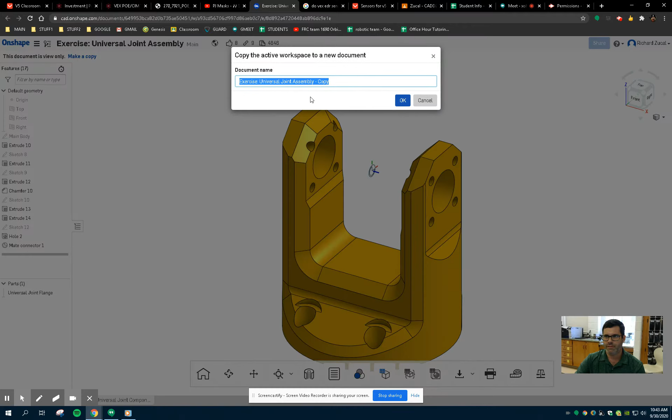Universal joint assembly, make a copy, universal joint assembly, Zucal. I think this is the second one, so we'll call it Zucal 2. Now you'll only see the window that I'm working with in the video. I have the slides up on another screen right now.

Create an assembly tab. Plus, create assembly. Drag it over. Rename it to universal.

I always feel like making words smaller, but I don't want to make the third word in universal joint assembly smaller because then it's a potty word.

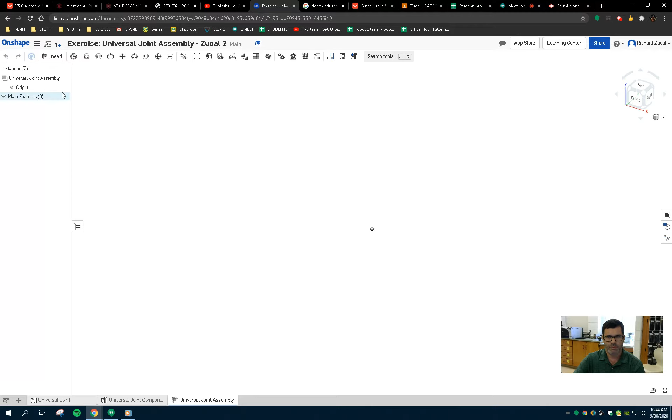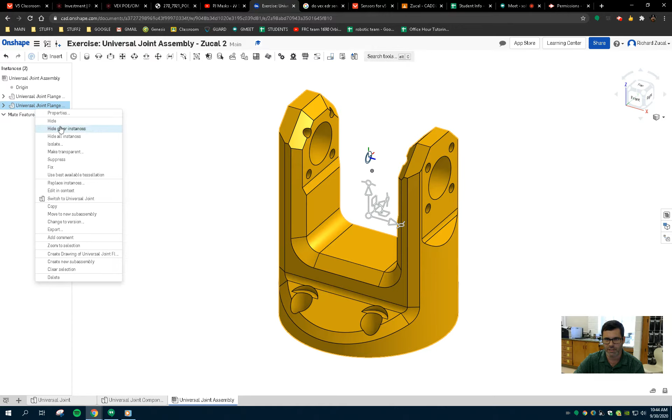Assembly tab, insert the universal joint flange. Insert universal joint. See, sometimes I click things, like I double click somewhat naturally, and I have to keep looking up at the little window on the left because I insert two things sometimes or create two things. So you got to pay attention to that.

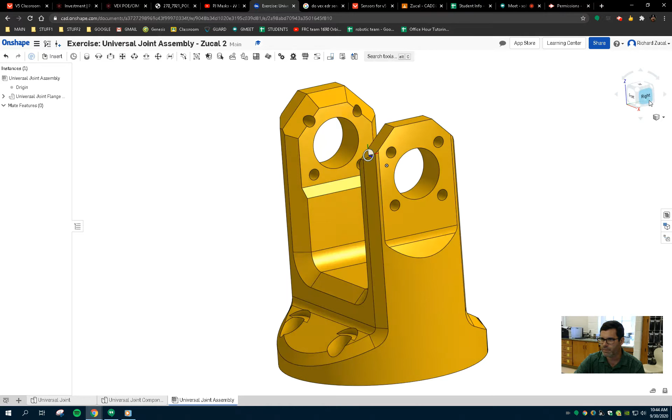Looks like they're trying to align the thing with that. I guess I'll try to do that the same too. One of the things I said in the other video, and I'll try to remind, is when they want you to align things with the origin, trying to do it just from the isometric view does not work. You want to have some two-dimensional views that you're doing it from.

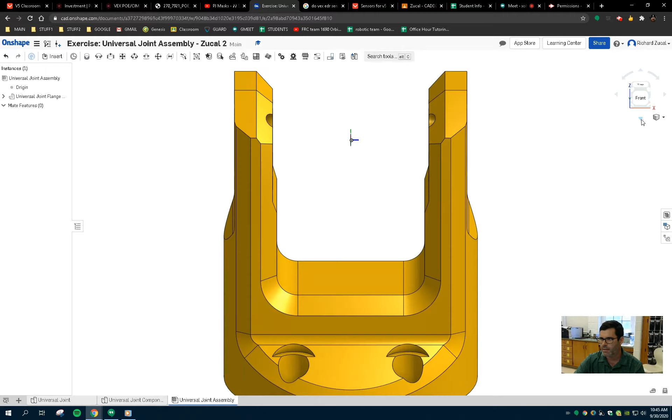Look at it from the right, and then look at it from the front, and then either the top or the bottom. So see, now that looks like it's aligned to the origin. So now I'll go back to my isometric view.

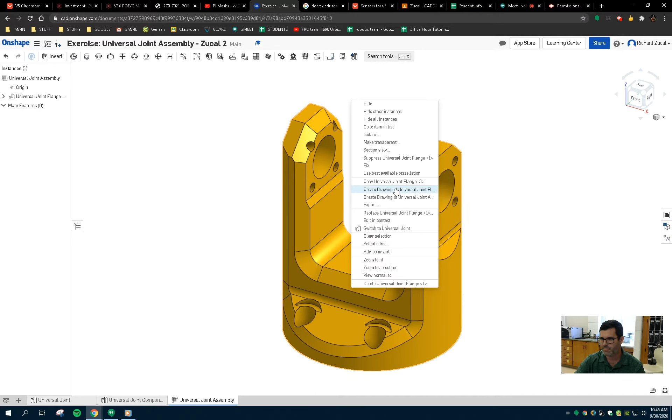Fix the instance in place. I wish somebody could just right-click on me and that's all it took to fix me. Take a lot more work than that.

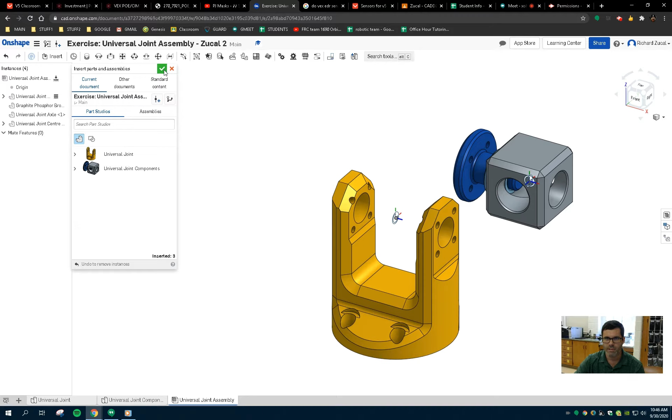Insert the 3 parts from the universal joint components part studio. Insert universal joint. Because I've done this before, it's actually feeling a bit easier. Okay, did I only put in one this time? I only put in one this time. And it looks like the picture.

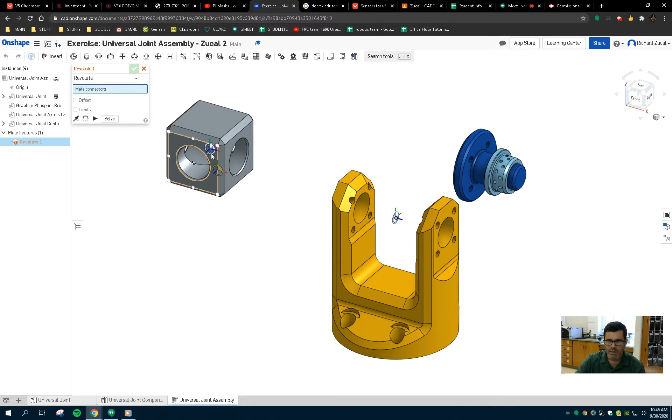Now I need to mate the center block. I'm actually going to drag the center block over here so I don't get confused with other things. What kind of mate do they want? A revolute mate. That one. And it's the one that's going that way. Right? With the center of this. And that looks good.

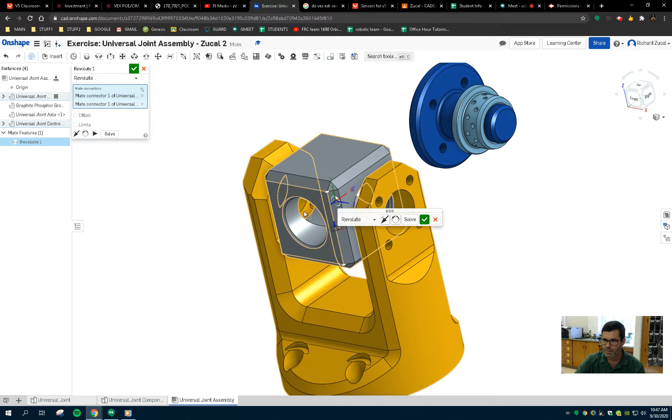And we have to have limits. Negative 90. 90. And we accept.

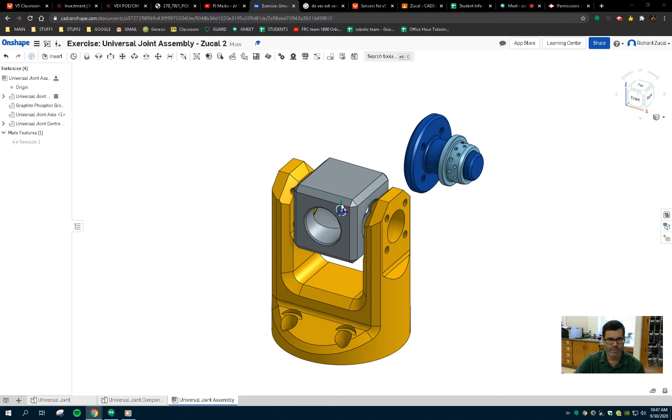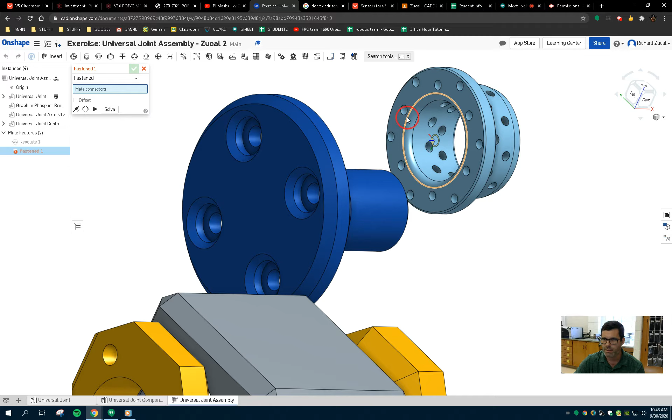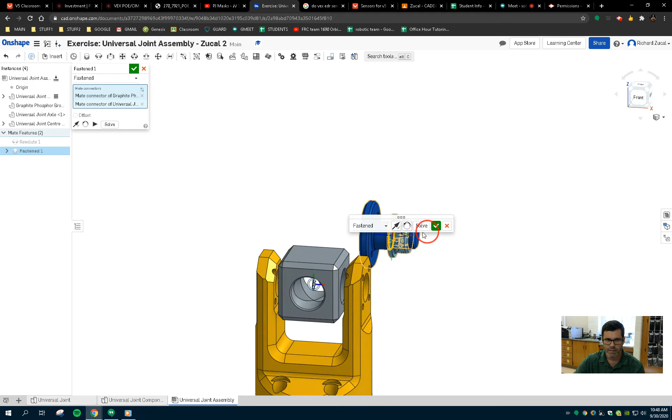The axle to the bushing. I'm going to drag them apart so I do it right. They want this mated with fastened. Needs to be this face with this one, middle ring. Man, you gotta zoom in sometimes. That one, okay? They look mated properly, accept the mate.

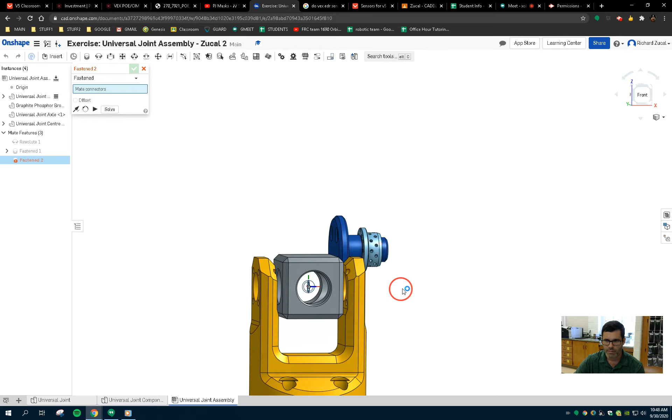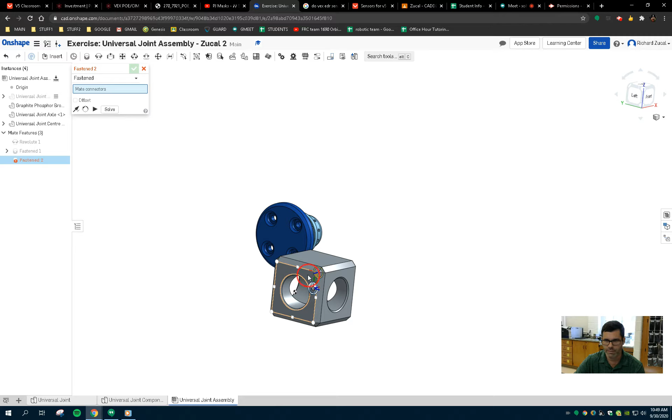Mate the bushing to the center block with another fasten mate. Fasten. You know what? It is hard to see that with this here, so I'm going to go over to here, and I'm going to temporarily right-click and hide that. Did it hide it? There it is. Now I can find the face that they want, which is this face, with that face, so they're flush.

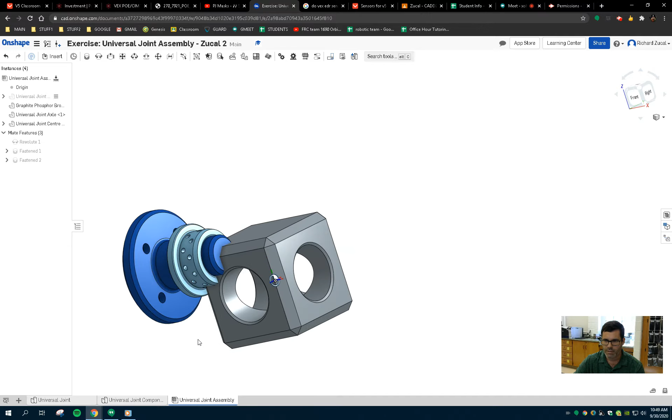That does not look right for some reason. Maybe I didn't pick the circle. Oh, let's go back. Let's hide that again. Fastened. Oh, maybe I was clicking over here, but not the center. Yeah, I think I clicked on that. It should be this.

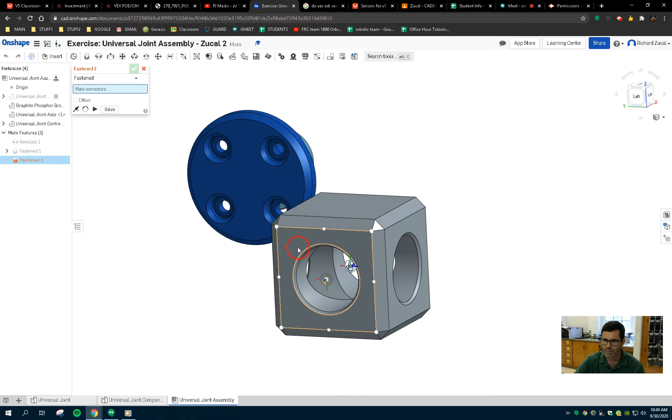With this. And that. And now it looks good. Nice and flush. I'm going to unhide or show that. Now they look like they fit together real well.

Restructure the assembly and move the axle and bushing to a subassembly. Select the two instances in the instance list. Right-click and choose Move to New Subassembly. So these two. There's the flange. So I need the graphite phosphor bronze bushing and the universal joint axle. And right-click and move to a new subassembly.

Rename it Universal Joint Axle Subassembly. I abbreviated, doesn't matter. Now it wants you to move that to the origin.

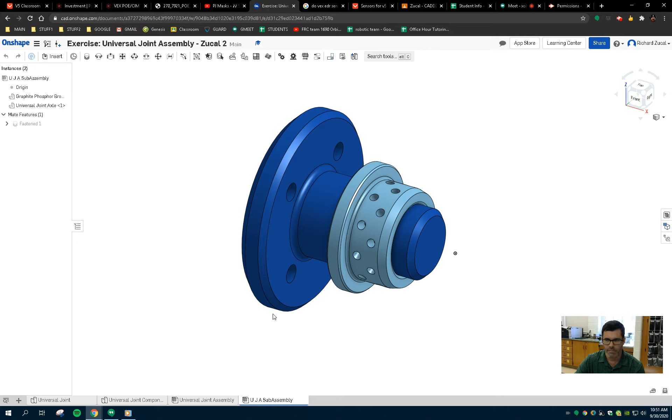So the reason why they want you to move it to the origin is so that when you are putting it into other assemblies as a subassembly, the default where it is placed is relative to where the zeros are, meaning you won't have to offset it or give it other fastening if your original placement is based off of where you want it to go.

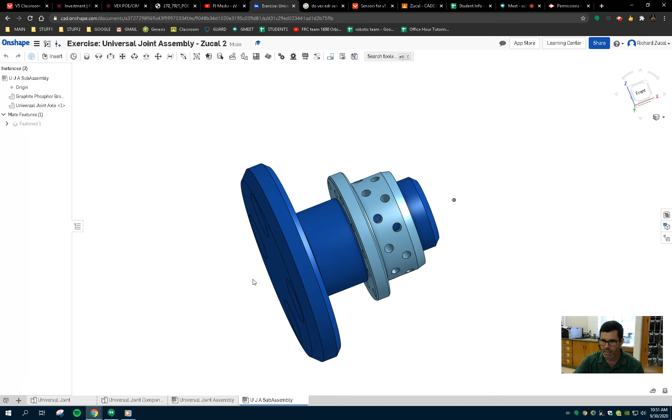Anyway, so now it says we want to click on that. Now this is the tricky part that I've gotten better at. I want to move this so that circle is over the origin. Why is it facing? It should be facing the other way, should it not? Huh. Well, I'm going to move it to the origin anyway. But to make sure I do it right, I'm going to look from side views, not the isometric view.

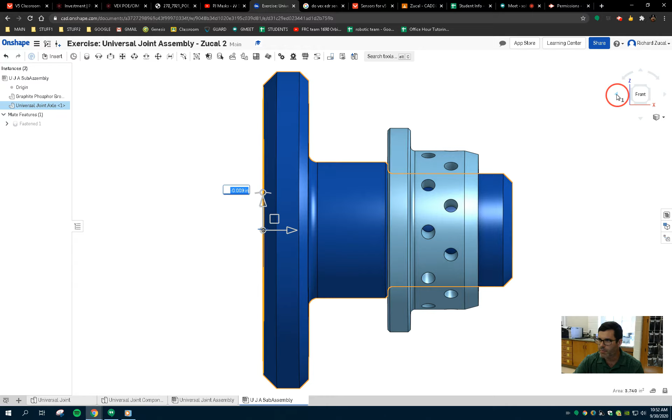Okay, pretty darn close. That needs to slide over. You definitely need a better method to doing that.

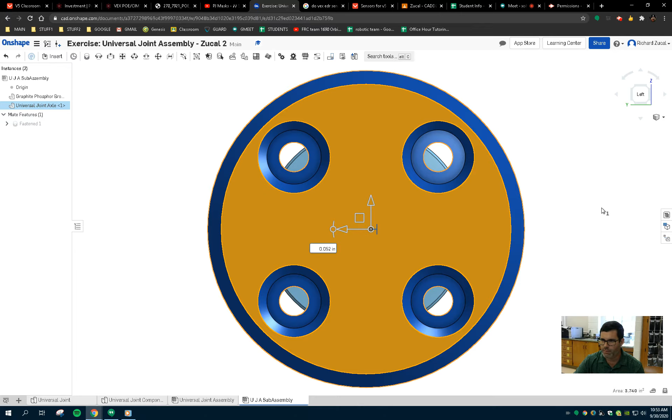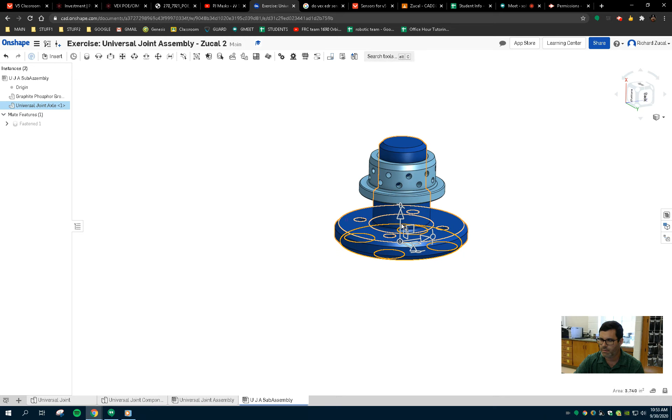The arrow's not going the way that it's supposed to go. So I don't know if that's going to be an issue. I think I'd like to flip it. Well, it says align to Z, so if I align it to Z, I need to rotate it. Which way? Okay, now it should be aligned to the Z axis. Yeah, it is, because there it is, up and down that way, and there's the Z up and down that way. Okay. Fix it in place.

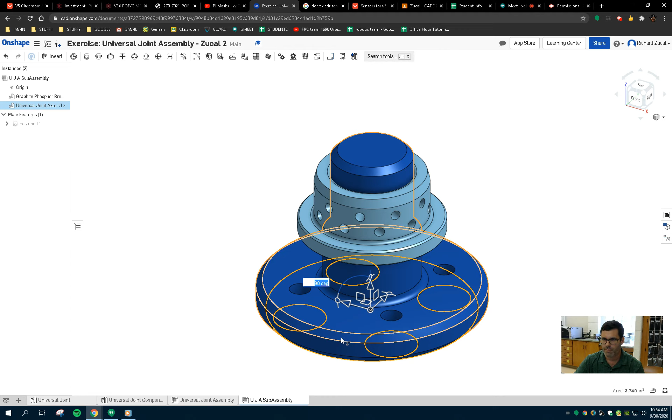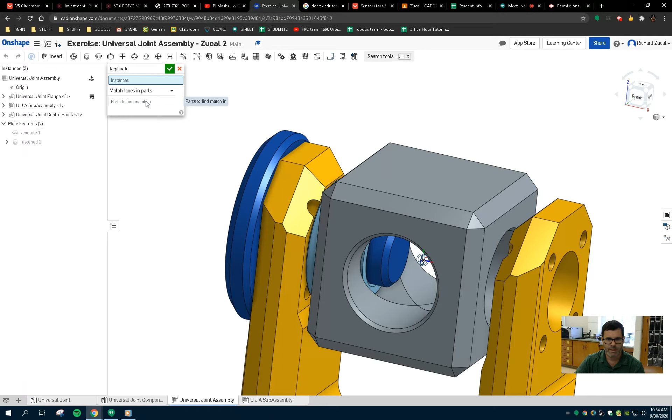Almost there. Navigate back to the main assembly. Select the replicate feature, which is here. Select the subassembly as the instance to replicate. And choose match individual faces from the pull-down menu. Then click the 3 faces on the center block as shown.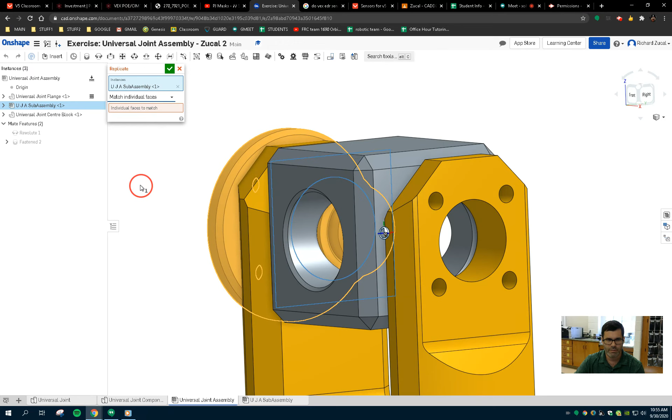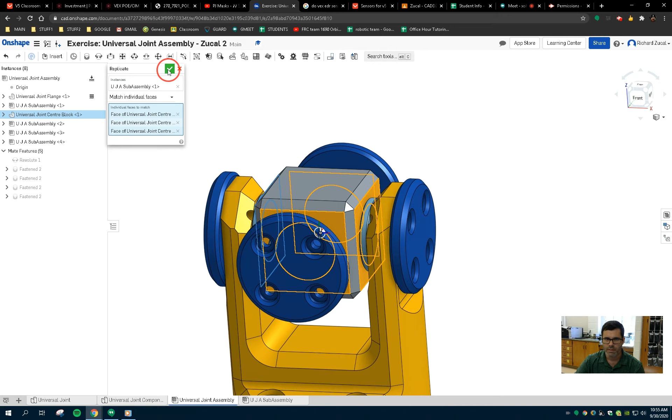Okay, so we need to click on that though, so it knows that we're selecting it. So that one, and that one. Oh look, they're on there, looking pretty good. Accept it. Copy and paste the universal joint flange to a second instance. Copy, paste.

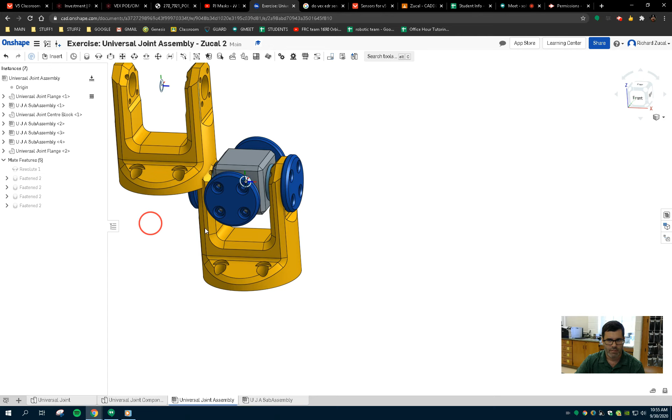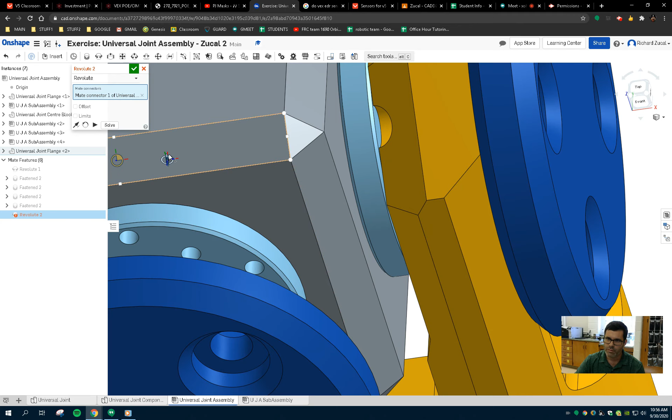Mate with a revolute so it can rotate. So, revolute this one with, now there's 2. That one, oh, that one I already used. I need this one. There it is. Minus 90 and 90.

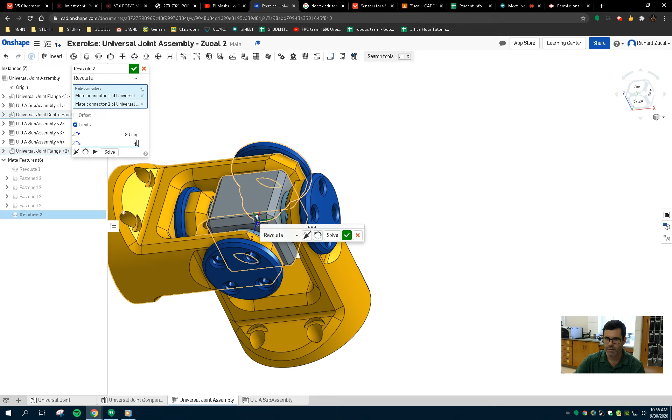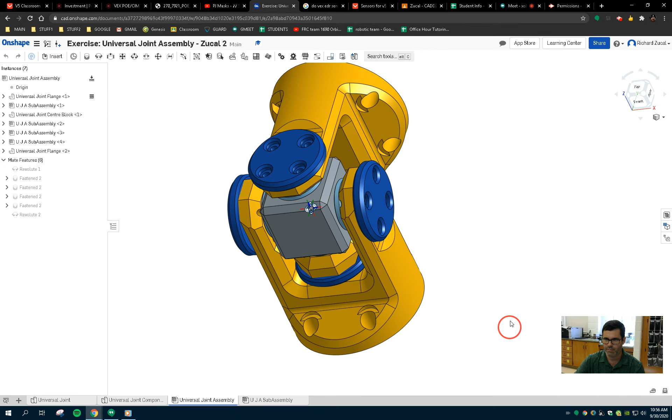Move the top flange. I moved it. Whoa, everything moves. Yay, I did it right. Although there's still interferences. I don't know if I completely agree with the limits that they put. But so be it.

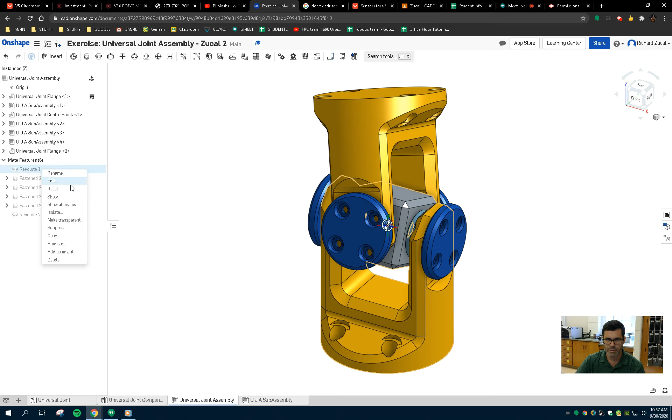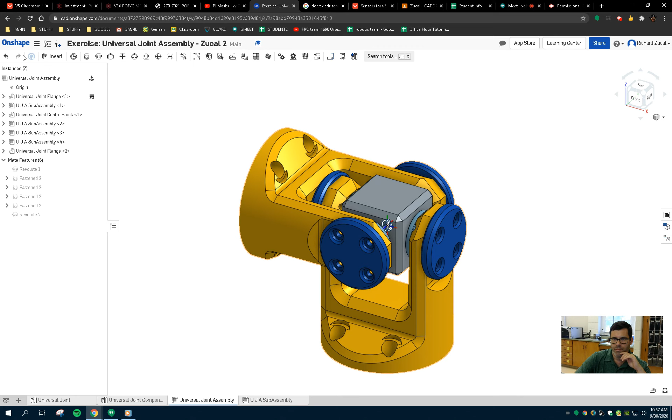Check your answer. Reset both mates. This one and this one. Next slide. Select the universal joint flange 2. See, why is it starting that way? That is not the picture. Maybe that needs to be different. Really? If I hit undo, it's going to do it. No, don't do that. Let's go back and look at that. Huh.

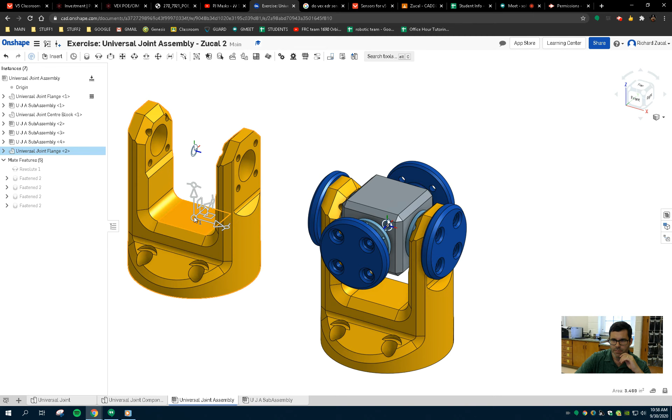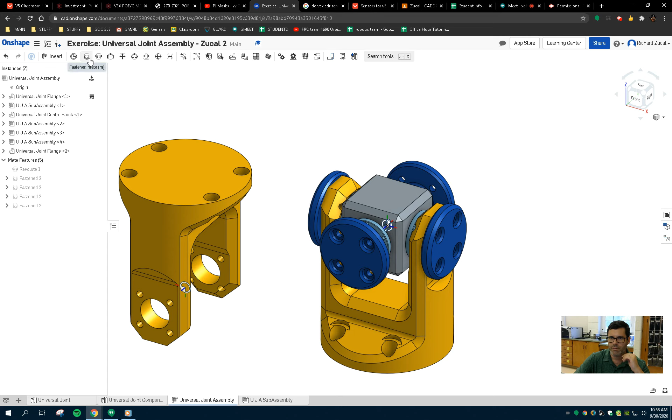You know what? I am going to just manually rotate this puppy. 180. And I'm going to manually rotate it this way, 90. And then I'm going to do that. I don't know why, but I think that's going to help. Yeah, see, now that looks good. Solve.

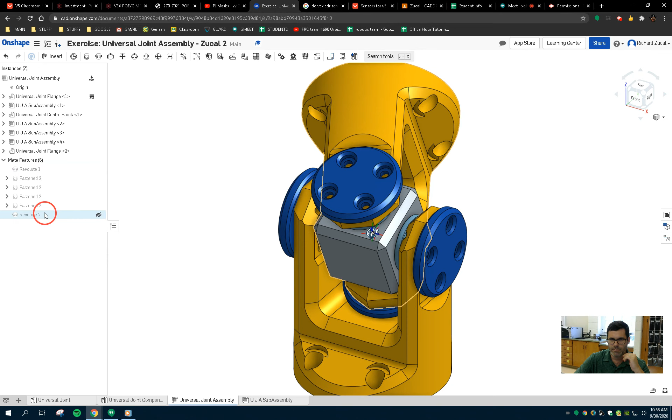Oh, I didn't put those limits in. Well, those limits aren't going to affect the grade, are they? File answer. Reset. Reset. There you go. Now move my face. Oh no, there it is. Mass properties of universal joint flange 2. Go to the self-check.

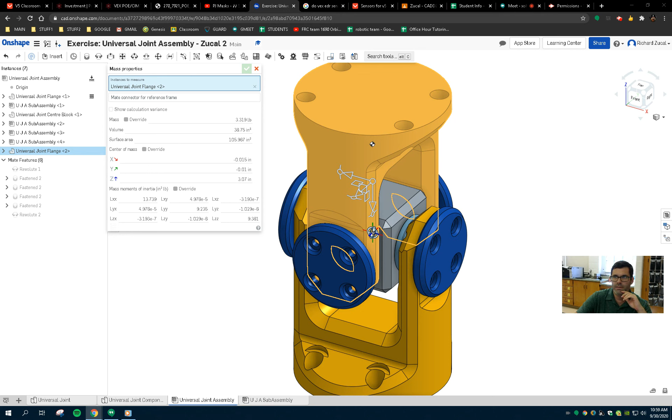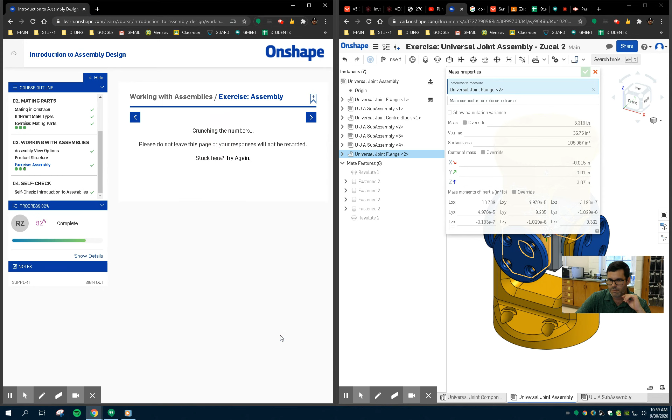Which is center of mass? Choose the best answer. So again, I'm not going to get it exactly right every time, but I'm going to look at it and say my biggest number is in the Z at 3.07 inches. Which one of these, A, B, C, or D, has the biggest one? Hold on. Let's get both of these in here for now. All right, so now we can look at it. So the biggest number, oh, there's 3.06. So that's probably it. That's correct. Ha! I didn't even have to verify the other two.

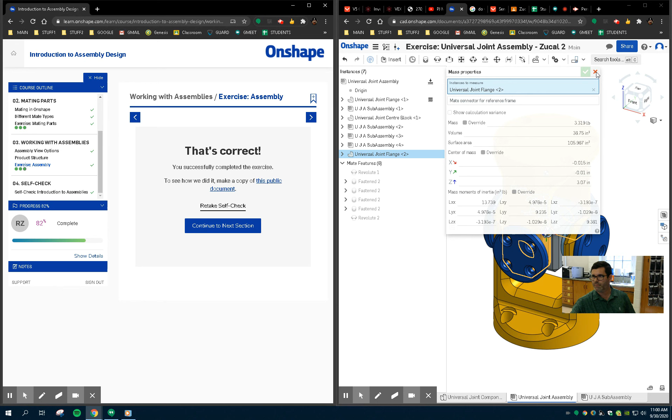By the way, there's a little SAT and other multiple choice test thing. If you're crunched on time, that's the one that fit my criteria, so that's what I went with. Okay, so that was it. It looks good, and I kind of tried a few things. So now I will stop the video.